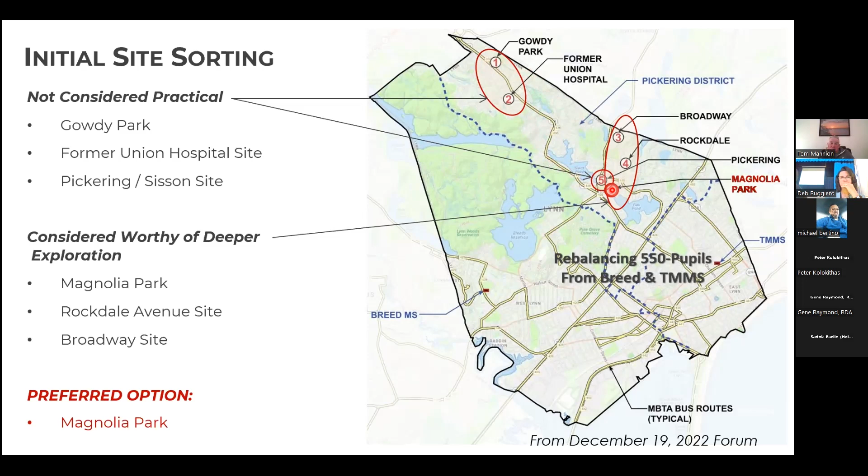I won't repeat all of that. So when we were last here in December, you may remember, but we were looking at a whole bunch of different options in precinct 1, everything from Gowdy Park up north down to where we are tonight at Magnolia Park. And we looked at some private and some public sites. And the school building committee, I think, wisely determined that for a variety of reasons, including traffic and all sorts of different things, that the Magnolia Park site was probably the best site to take a look at. So we started looking at how we could build a project on Magnolia Park.

And just to orient you, this has a lot of circles and colors. Magnolia Avenue is right here, Flax Pond is across the street. It doesn't show, it's off the page. And if you kept going down, you'd end up at Wyoming Square. The tennis courts out behind Sisson and the Sisson play area are here. So Pickering's up at the top and Sisson off the page, and Magnolia Park was our first focus.

So one of the things we knew about it was that it was landfill, and because there used to be, depending whether you thought it was a river, stream, or just wetlands, there was the connection between Sluice Pond and Flax Pond, and it ran through here. So we had to understand what the soils were going to be like down below the surface, and we assumed they were going to be marshy and mucky with maybe some fill.

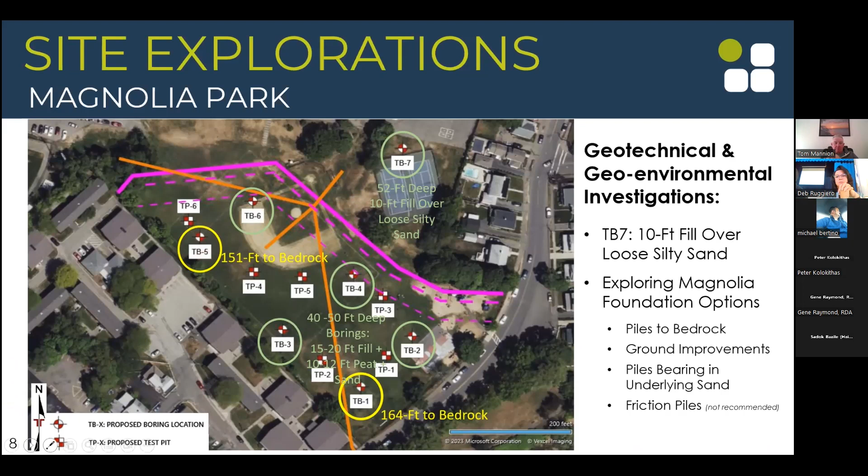The other thing that happened while we were in this phase - we always knew that part of Magnolia, well let me orient you again: here's Flax Pond and Sluice Pond, and Pickering and Sisson. So down in the park, kind of where the baseball field is, what's called a floodplain. And the government, the FEMA agency, is actually proposing - and this came while we were studying the site - that the whole of Magnolia Park be determined as a floodplain.

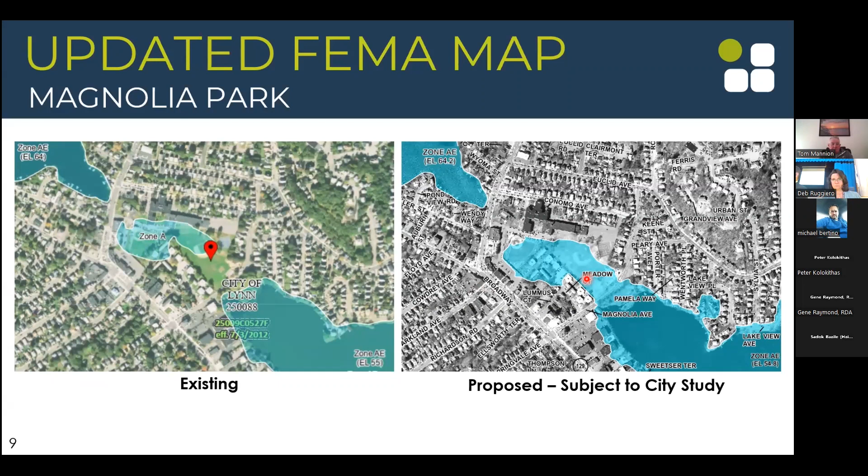So that just adds more complications as well. You have to raise the building up out of the floodplain. You have to think about how you're going to get to it in a situation where there may be flooding, et cetera. So between the soils and the floodplain, we started saying to ourselves, we're going to have to look at a number of options, and maybe some of them don't involve staying on the park.

MSBA requires that you look at, not as a realistic option, but that you assess the building you're in and figure out what if we did nothing for the educational program but just brought the building up to current day code. I think they want you to understand that no matter what you do, we think about $71 million, 100% city cost, just to bring this building up to all the various codes. You might not have to spend all this just to renovate it and use it as a school, but that's one of the options we have to consider.

They also wanted us to look at an addition renovation. Believe it or not, there's no room left on the site because we can't go towards Sisson, so we'd end up taking properties between here and Broadway. That would be about $203 million.

Down on Magnolia Park, we looked at a couple of options, and I'll show you all of these. If we just stayed on Magnolia Park and built a building, we'd spend about $195 million. We looked at putting part of the building on Magnolia and then having a bridge over to where the tennis courts are right now at Sisson and the play area. That also is around 200 million.

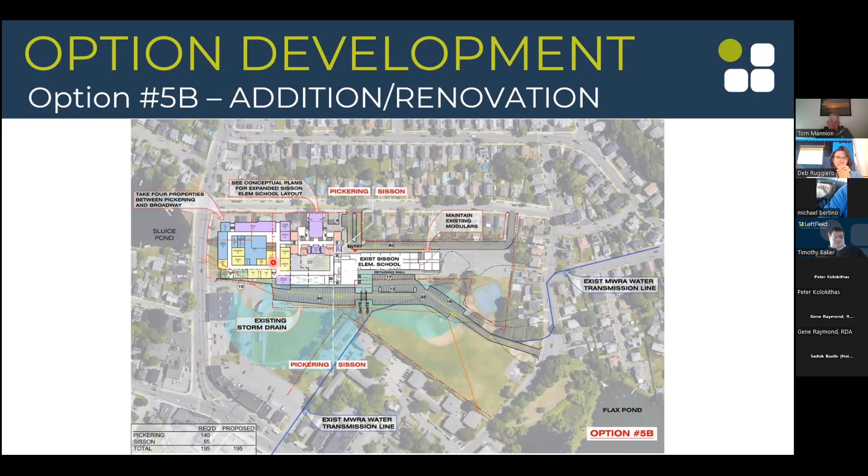No pilings, but a long duration, because building the additions takes the same amount of time as building a new building. Then you finish that, move the kids in, but then spend another year renovating the existing building. So between the takings, the longer duration, and the disruption, this is not a design we're recommending.

Whenever we were meeting with the school building committee, we didn't want to just show them plans, so we always wanted people to have some 3D images and get a sense. I won't go into detail on all of them.

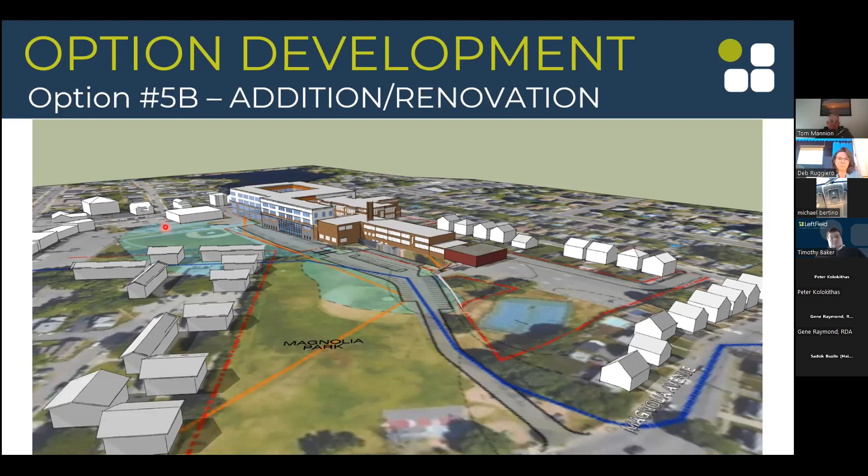This is Magnolia Park in the foreground. You go up the hill. This is the Sisson play area, the modulars, the Sisson wing, and then what we would leave for Pickering. This is the scope of the new addition, since we're not heading down onto the baseball field. We've developed floor plans for all these options.

So these 3-dimensional images, the site plans, the floor plans, all went to the professional cost estimators, which was the genesis of some of those numbers we showed you earlier.

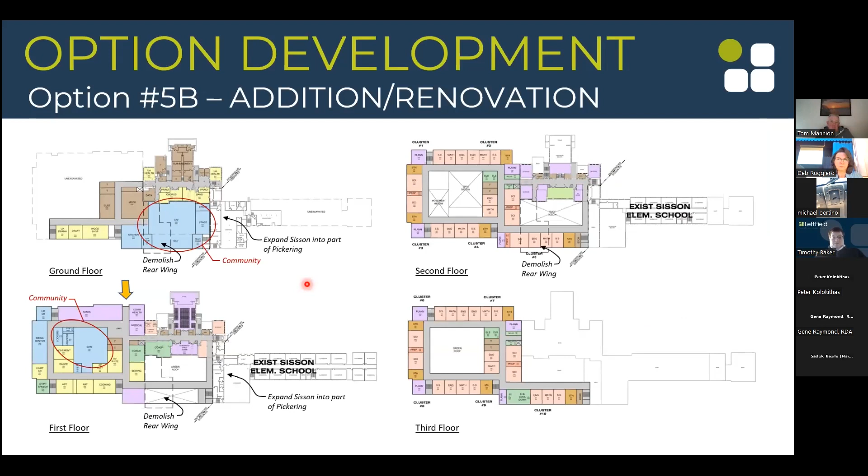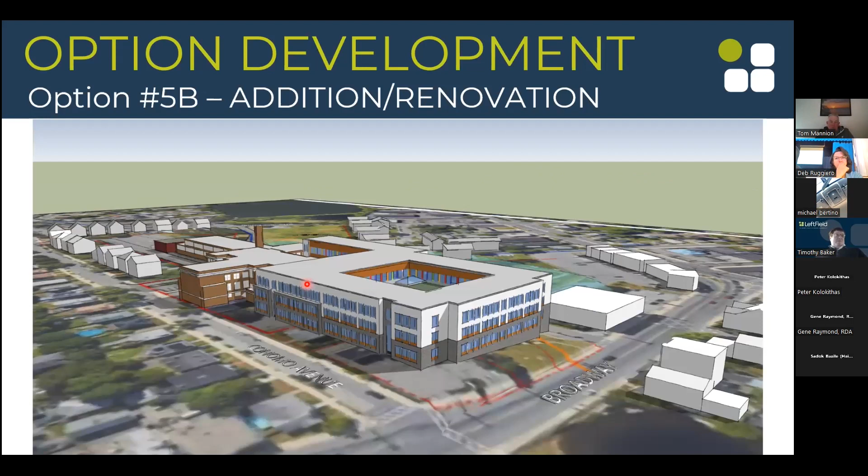This is another bird's eye view above Wyoming Square, showing what it might look like. And if you were over the intersection of Conomo and Broadway, what it might look like. You'd have the original Pickering Sisson in the background, and this big chunk of school where you'd have to take all those properties.

So that's option 5B, an addition renovation. We didn't recommend it because it's the most expensive and most disruptive to the neighborhood and to live through. I don't know if anyone has any questions about it.

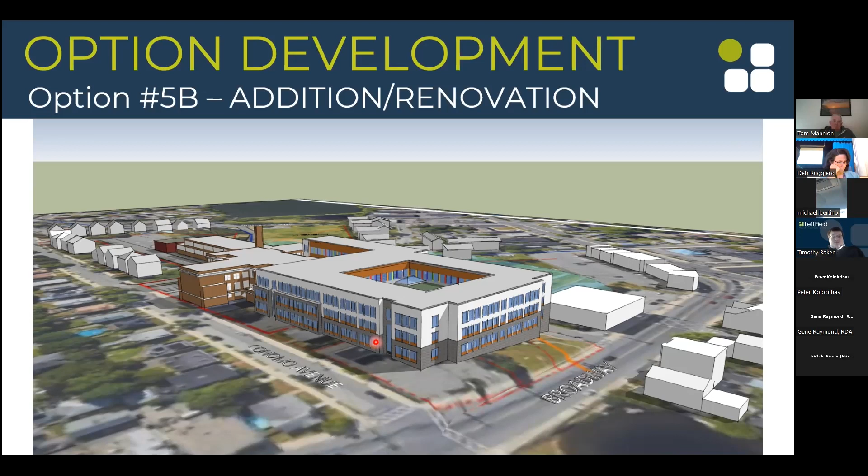The next one we looked at was leaving the existing Pickering in place, leaving Sisson in place with the Sisson playground, and concentrating all the construction down on Magnolia Park. We know between the three schools how many parking spaces would be needed, and we've shown them all so that our site costs are accurate.

This is the footprint of a 4-story building, similar to Thurgood Marshall. With this, we would need the 160-foot deep pilings. And speaking of noise and disruption, that would mean a lot of banging for a lot of months.

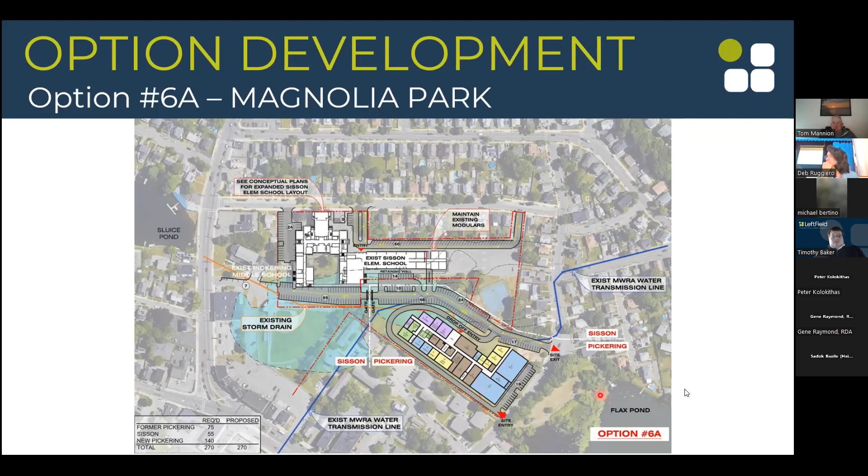Oh, is that up on the screen? Is it? I'm sorry, maybe I can move it to the side. How about that? Thank you, Lynn.

So what that might look like, again Pickering and Sisson remain in place. The new parking is off Magnolia. Like Thurgood Marshall, there'll be a 4-story academic wing and a 2-story community wing. The community wing is used by the school, but it's a gym, cafetorium, locker rooms, things that might be used by the community after hours.

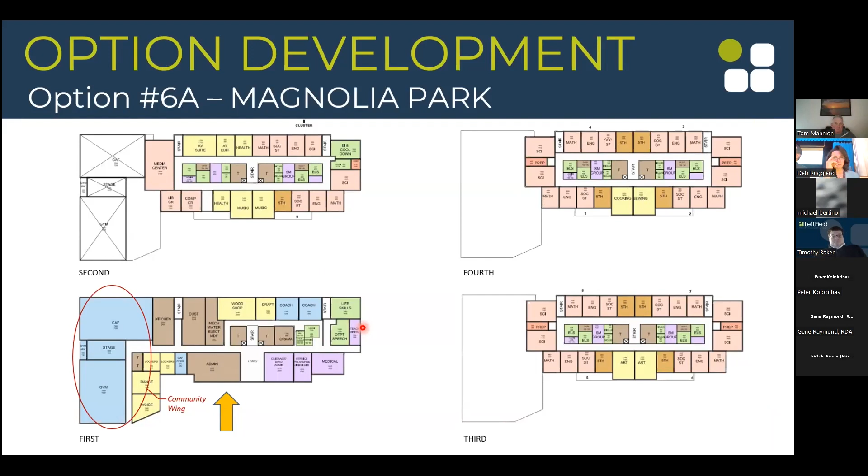And again, floor plans show all the spaces in the educational program, and another view as if you're up over Flax Pond, with the housing authority buildings here. By the way, any of these white buildings are just what we call wireframe diagrams. They're not like buildings are disappearing, we're just trying to put our massing in context with what's there.

So if you were up above Conomo and Sisson was over here on the right, you'd be looking down into the park on this 4-story academic and 2-story community room. Given the expense of the foundations here and also the risks, we think we know what's in the soil, but even when you start construction you might find something a little different, because don't forget, there's a lot of fill here.

We did not recommend this as a preferable option. I don't know if anyone has any questions about it.

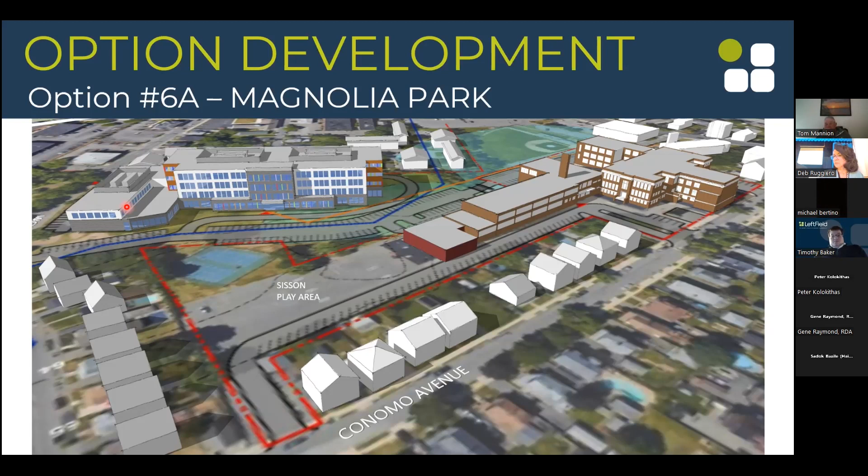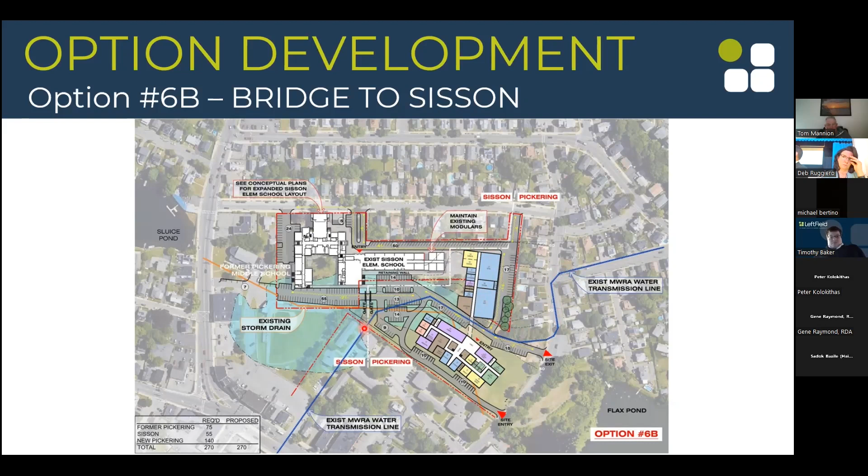Okay, there's 2 more. Because the foundations were so expensive, we looked at putting the 4-story academic building down on Magnolia, and doing the 2-story community wing up on the Sisson Plateau, connecting them with a bridge, because this blue line here is an MWRA water line serving other communities, and we cannot build on top of it.

Again, we did the floor plans, and this is what it might look like from Magnolia.

We have a better kind of view. This is what it might look like from Conomo with this 2-story community wing up here, and then you can just start to see a bridge that would go over and connect to the 4-story academic building.

But in a situation like this, we're pretty much taking up the Sisson playground and the tennis courts, and we still end up spending a lot of money on foundations down on Magnolia because of the bridge and the inefficiencies in building 2 separate buildings. It's a little more square footage, so this one ended up pretty much in the same ballpark as the option before.

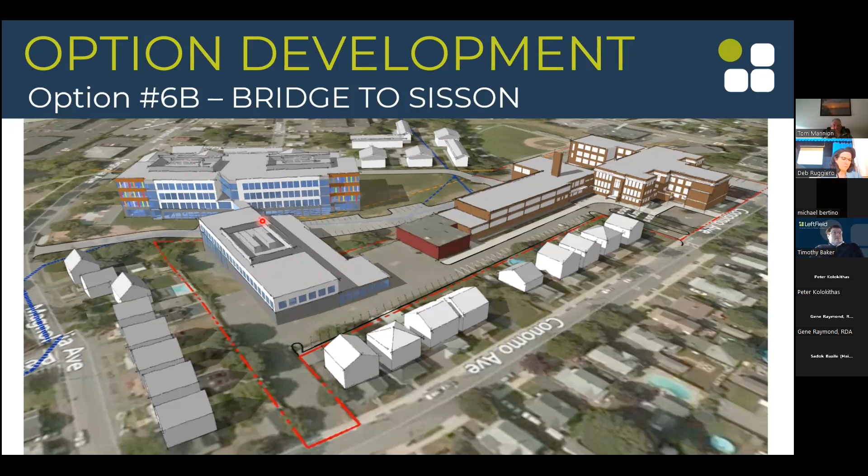So that left us to say, let's not do anything down on Magnolia. Maybe we can use it for parking and maintain it as a community park for the neighborhood. And what if we took down the modulars that are attached to Sisson, knowing we could replace those classrooms within the shell of the existing building?

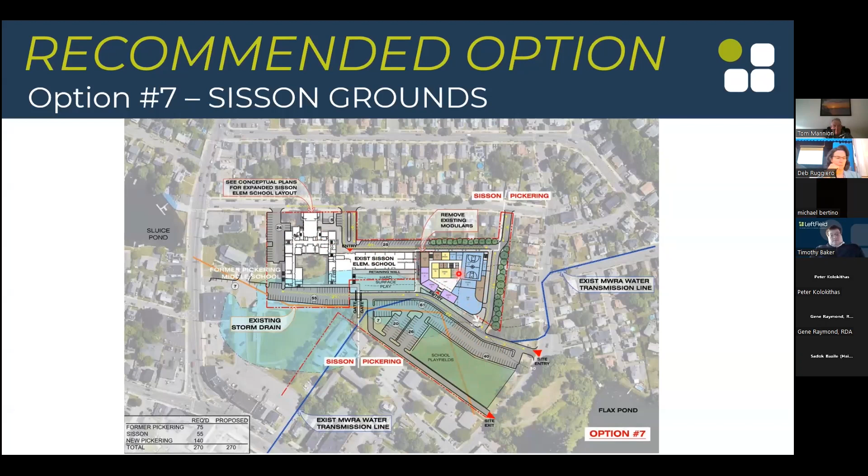Magnolia stays as a play area, maybe under the control of the school department, but we don't have to deal with any of the utilities down here, and best of all, we don't have to spend any money on deep pile foundations. We think we might have to do a little bit of work on foundations here, but nothing as far as piles. The soils up there are much better.

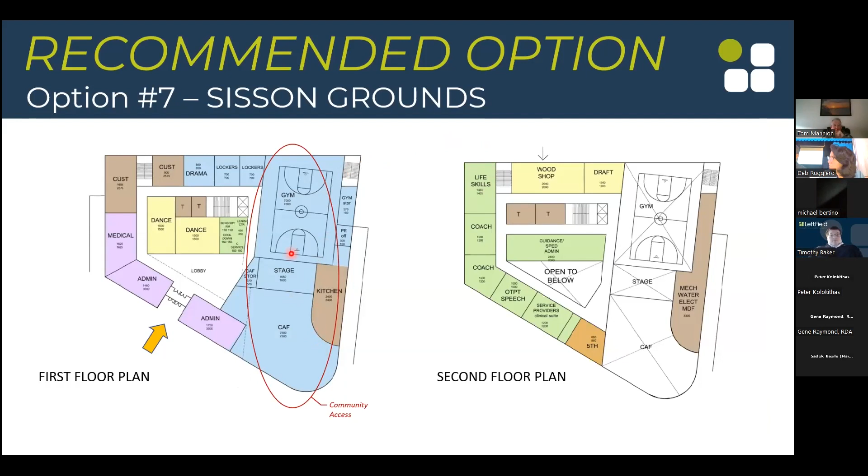So we still have the ability to have a community wing kind of buried inside the ground floor of the building, and we have all the other spaces for the educational program.

And this is a bird's eye view where you'd have, we treat the first couple stories as we did at Thurgood Marshall with maybe a darker color base, but then everything above that would be nice white panels, and it will not be looming over the neighborhood. We also want to maintain a buffer so that we can treat it with evergreen trees, and we want to do that for the neighbors on Conomo and Magnolia.

I have a few questions. Sure. So I have someone who has submitted 3 questions via the website.

First question: as a parent of 2 students at Sisson, a concern of mine is outside time. Since our students do not have space within the school for lunch or specials, their only time out of the classroom is during recess or gym. Currently, we utilize the tennis courts for gym and the schoolyard for recess. Where would that take place during construction for the next 2 years?

When we phase this project, the permanent play area is going to be down at the Magnolia field level, and we're going to replace the hard surface. We are currently in the process of adjusting this plan, but we would have hard surface like they do now, and then also we would connect it to the play fields, so they'd actually end up with more play area and a better variety. Does that make sense? Yep.

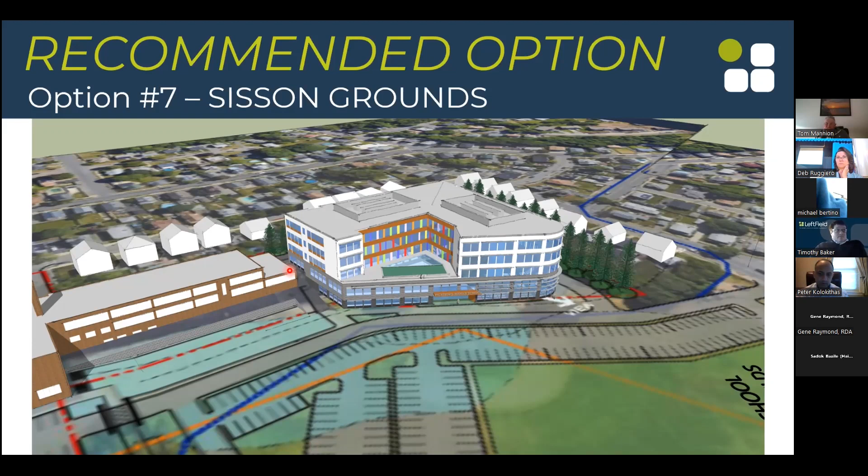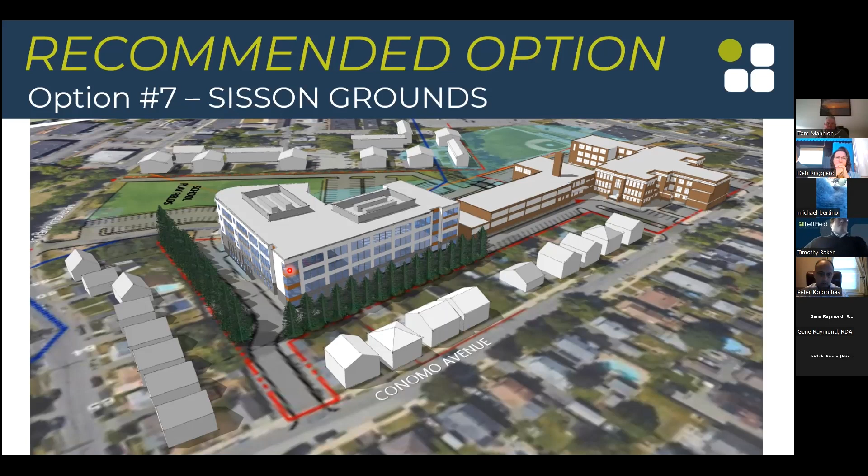So for a number of reasons, this is the one that has the least financial risk to the city. And we feel like it's a more compact building, and it will have all sorts of operational efficiencies going forward.

So one of the questions has been, if one of the first phases is taking down the modular classrooms so you can construct this, where would those classrooms go? Where would those kids or programs go? So there are currently two kindergarten classrooms and two special ed classrooms in those modulars, plus another smaller office.

And we have studied the existing Pickering building, which is over here on the right, and then the Sisson classroom wing is over here on the left. There are former locker room spaces that are not used, and we could create space next to Sisson, so kids don't have to go all the way through Pickering to get to them. We could create a couple of classrooms in what's currently unused space with windows, connected to Sisson with a fairly simple renovation project next to the gymnasium.

We could also take the space we're in tonight and put up temporary partitions, because this space could be restored, but we could fit three classrooms if you make use of the stage and the seating area, just in this area alone. So this might come offline for the construction period, but again, it could be put back together. Between those spaces, there is more than enough room to house the programs that are in the Sisson modulars.

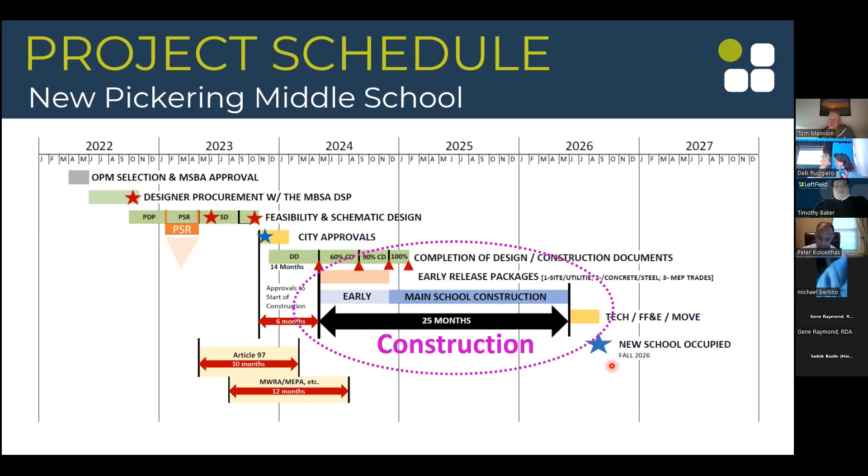I'm going to ask two questions that seem to be linked together, though they're from two different people. The first is around the classrooms created because of the modular being taken down. Are costs to change Sisson included in these costs, or will the city need to find funds for that? And second, Sisson lacks classroom space, so the modular classrooms moved to the existing Pickering space, would that become permanent?

I'll do the second question first. The spaces we create at the Pickering, the auditorium space would be temporary for the construction period, so we would restore the auditorium. It's fairly simple to take the seats up and put in some partitions. The spaces we might create in the unused areas next to the gymnasium would be outfitted to current day standards, so they could be considered permanent for Sisson. Those costs are also included in the cost estimates.

It's part of the phasing plan. Before a shovel goes in the ground out at the playground, as I mentioned before, the first part of the project would be making the new playground for Sisson down on Magnolia. It would be creating these spaces within Pickering and then removing the modular classrooms.

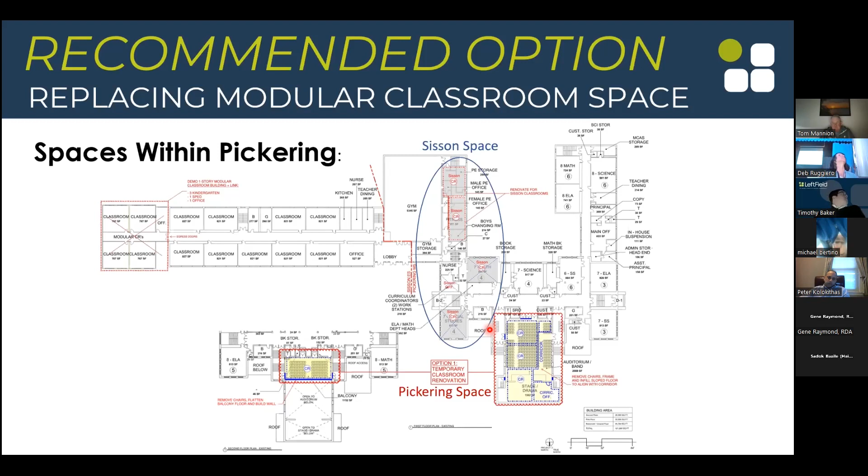All right, I don't see any other questions, so I just want to thank all of you for being here. Thank you for the thoughtful questions, and please continue to share your feedback as we go through this process so we can make it the best that it can be and end up with a school that we can all be really excited about.